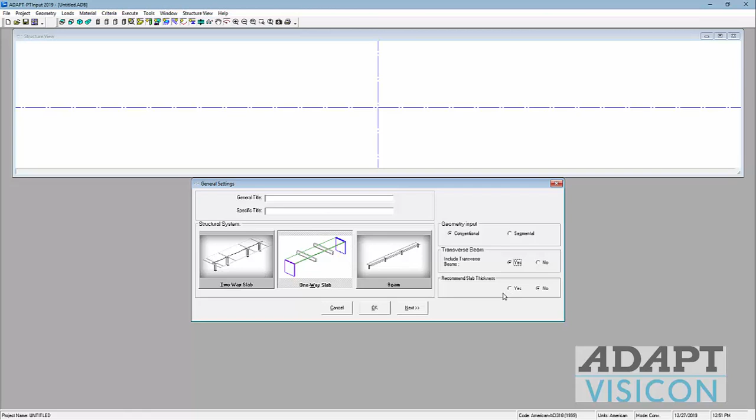We will include transverse beams as supports for the one-way slab, and we'll go ahead and leave off the recommended slab thickness. If we select this, the program will by default recommend that thickness in the span geometry input. So we'll go ahead and select next. We're going to select ACI 318-14. We're going to leave the design settings analysis options as set here.

One thing to note is we want to make sure we use interactive. This gives the user the ability to interact in the recycling screen, meaning you can change the force profile, etc., without having the program automatically converge on a solution and exit out of the recycler in an automatic fashion. If there are questions about these other selections, you can refer to the documentation found under the Help menu, which gives a definition of each of these different options here for the analysis.

Under Design Options, we're going to use all provisions of the code. There is an option to disregard the following provisions. So if we select any of these three or all three, for example, the program will actually ignore that in the processing of the design.

So one questionable option here might be the design capacity exceeding cracking moment, which is not technically necessary for an unbonded system using ACI. However, even if we don't disregard this, the program still actually recognizes the fact that we're going to set the tendons to unbonded, and it will not add any additional rebar to meet this criteria. So we'll just use all provisions.

Below, under generate moment capacity based on, this just means that for the capacity and demand report that's part of the report generator, block number 32, the program will show capacities which are based on the calculated reinforcement, post-tensioning, and user-defined reinforcement. So whenever you generate design value moment capacities, those should always be greater than the demand.

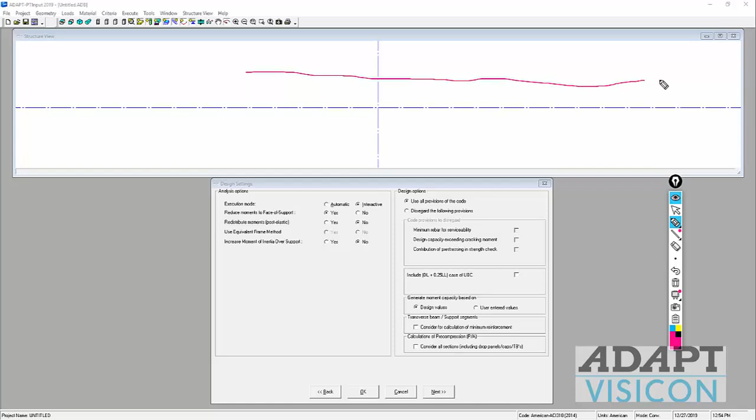The next option allows the user to consider the calculation of minimum reinforcement relative to the transverse beam. For example, if we take just a longitudinal elevation view of this system, we're going to have basically 7 spans that look like this. And if we look at how the program calculates minimum reinforcement at this section cut here, that could either be based on only the depth of the slab, or it could be based on the depth of this full transverse beam, which obviously would lead to more minimum reinforcement.

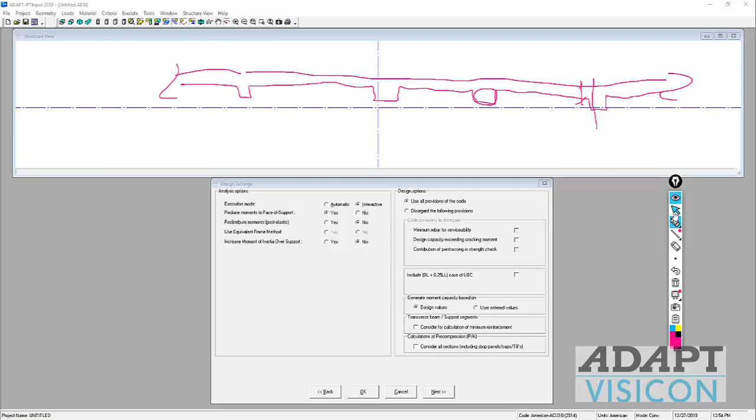So this option here allows you to consider this full depth for purposes of minimum reinforcement for a one-way slab, which is 0.004 times the area of concrete in tension for a one-way slab subject to the ACI 318-14 version of the code. We're going to go ahead and leave that off for now.

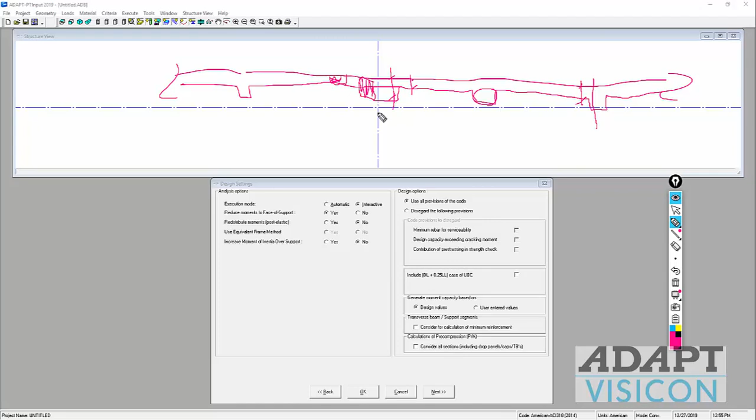Also, calculation of precompression. The program also can calculate and essentially determine a force necessary to meet precompression. That precompression can either be relative to only the slab depth or the transverse beam depth. So depending on what you select, if I select this, then you'll likely have a higher force necessary to meet precompression because, if I take this out of plane for example, it's having to calculate a force based on this full block area versus just the slab area, which might be just this block here. So you have two options there.

We're going to base everything only on the slab depth for this example. We recommend the user make their own interpretation of how the code is read and how that should be interpreted for design. So the option is given here under design options.

We'll go to next. I'm going to go ahead and set this up to 7 spans. The outer spans are going to be 30-foot bays. The interior spans are going to be 27.5. So I'll just copy and paste those down.

For the width, we're going to just base this on a unit strip. So we're going to say if we have, for example, a plan view, we're going to have beams. These will be the post-tension beams that we'll show also in another tutorial for effective beam design in this program. So we're going to say the span is this way. We have slab spanning this way with 7 spans.

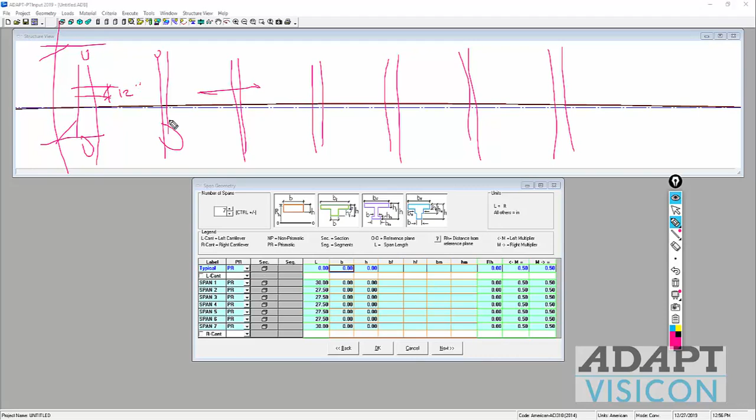And because we might have a unit strip representation, we don't really have to model this full panel. We can model just a unit strip based on whatever arbitrary width you want. Typically this will be 1 meter or 1 foot, 12 inches. We're going to base this on 12 inches. So we'll say that the B dimension here is 12. And the height for this slab we're going to say is 7 inches.

If I enter the data in the typical column entry or the typical cell and press enter, that'll push those all into the different spans. And you can modify each span separately as needed. For the reference height, we're going to set the reference height equal to the depth of the member. So if we zoom out here, we can see the datum or the reference line is this line here. If we leave this to 0, that's fine.

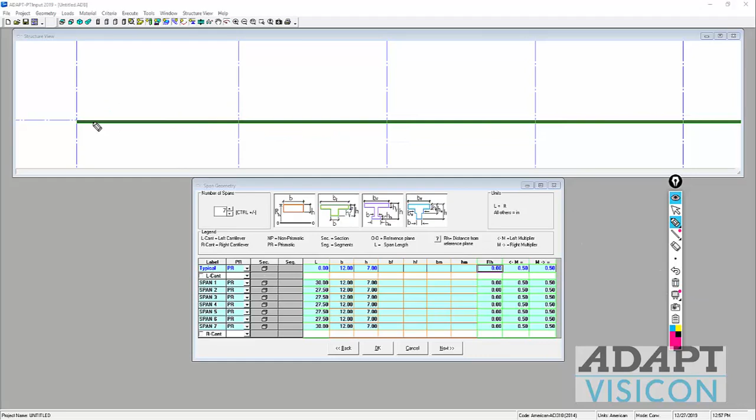This allows a user to actually step a member. So if you wanted to offset this span up, maybe this one down, you could create offsets in the member. However, if we leave this slab, which is the same elevation along each span, as 0, the control points for the tendons are going to be based from this datum downward, so they'll all be negative, which is not typically how we may reference them on plans for construction drawings. So I'll set this equal to 7 so that the program will represent everything upward, which will be positive from the slab soffit. So we'll go ahead and press 7, enter.

The multiplier, this left and right multiplier, if I go to a plan view, and I'll use these icons at the top to control the visibility of the structure view. I'll go to the plan view, and what this means is that the left multiplier right here actually is this side. This is the left side. If I'm standing here looking this way, this is the left side, this is the right side. So we take this B dimension 12, we multiply it by 0.5, and that just pushes a portion of the tributary this way and a portion this way. It's centered, 6 inches on one side, 6 inches on the other.

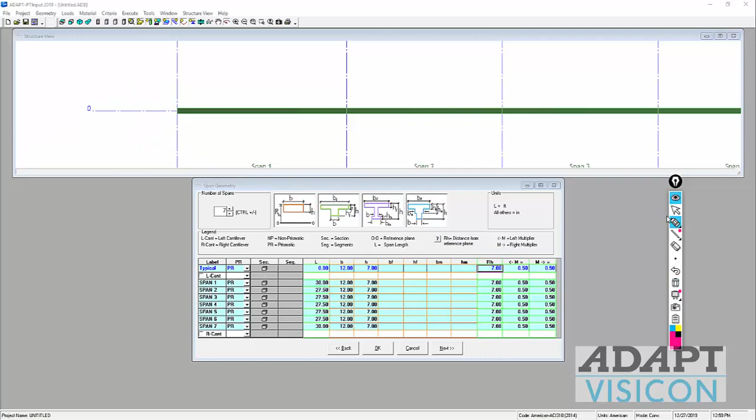If you wanted to base the design on the full panel width, let's say the full panel width is 30 feet, we could input a 15 value here. And we'll do 15 times 1 foot on one side, 15 times 1 foot on the other side, and now we actually base the design on this full panel. This will be like a full bay in this case. So you can increase this to something greater than 1 if you wanted to.

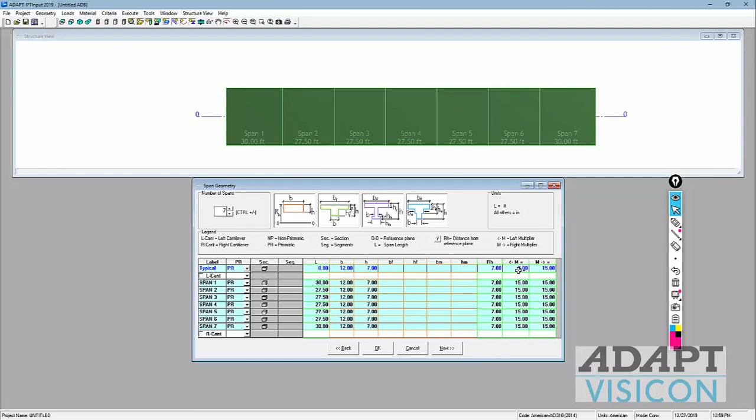Okay, so we'll go back to the unit strip of 1. We'll go next. The transverse beams now, we're going to define what those transverse beams are. So we're going to say for each support 1 through 8, we're going to have a transverse beam. I'll go ahead and select this and press enter. The height of the transverse beam we're going to say is, let's say this is 21 inches. Okay, this is from the top of the slab down.

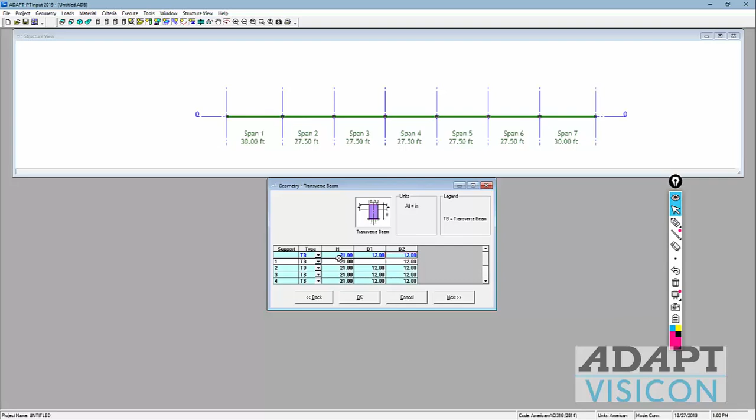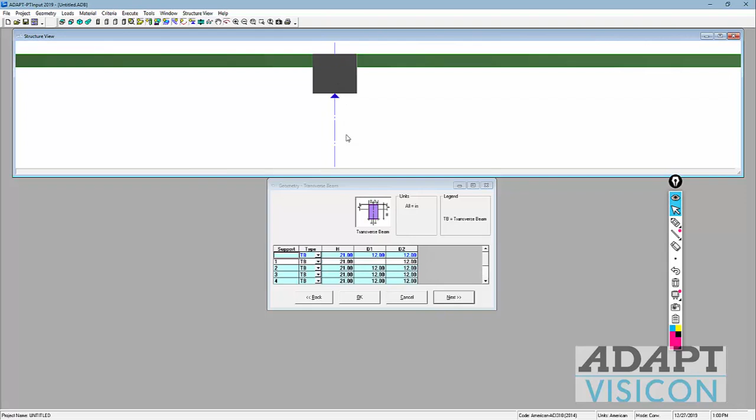The D1 and D2 will say it's 12 by 12. So we'll say this is 12 inches and 12 inches. And having done that, you can see the member here. Actually, let me come back to, okay, so I'm just looking at the wrong view here. I'll go back to a side view, and this shows that member depth. You can see there's actually a pin support. By default, when we create a transverse beam, there's a pin support associated with the joint. So those are the transverse beams now.

For the support geometry, because we're using point supported transverse beam, we don't really need to fill any of this out. If you did have a wall below or a column, for example, typically a column might be more associated with a two-way slab versus like a wall, which would be a continuous support, which would then fall into the category maybe behaviorally of a one-way slab. If you have a column support, typically you would have two-way bending near the column.

So we'll leave the lower and upper walls options set to off. We're using the transverse beam option. This left and right edge, this is applicable only to two-way slabs. That's defined in the two-way slab tutorial.

For support width, we're going to take a look at some of these options here. By default, the support width is set to 0, which means that the program doesn't have a width that it can dictate where you're going to cut face of support moments and shears and design values at. As the user, you can choose to select support width here. That will automatically define the support width as the dimension of the transverse beam.

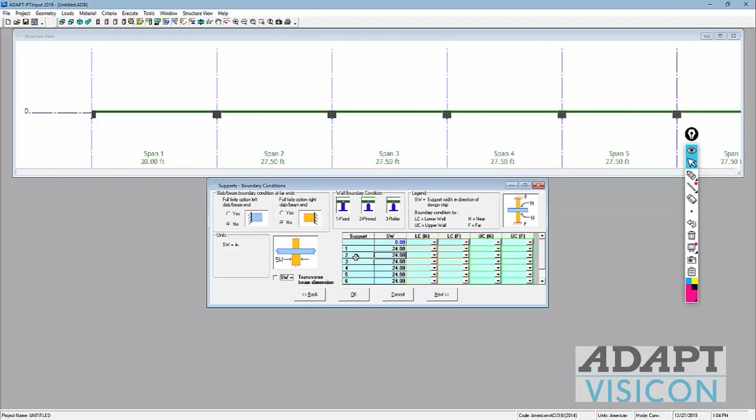If you wanted to try to override this, notice it locks you out unless you deselect, and now you can actually override to a different value. So this tells the program where to cut face of moment and face of shear values off for the design. We'll just use the transverse beam width.

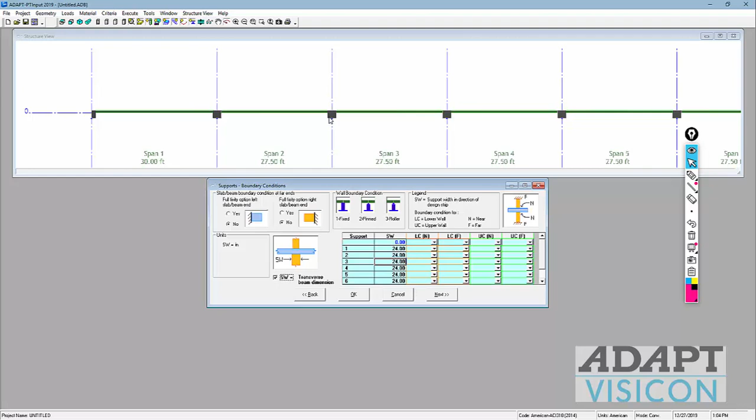You can also modify here the support fixity at the joint near the slab or beam, if this was a beam design, or at the far end. That's controlled here. Notice these are all inactive because by default we have a transverse beam which always creates a pin support at that location.

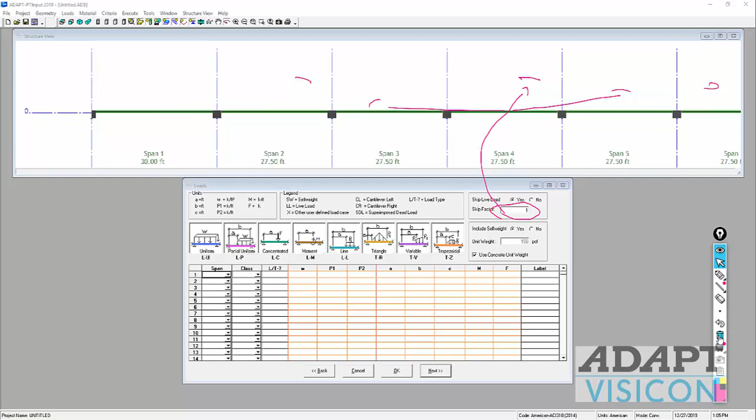We'll now go ahead and load the slab. We're going to turn skip live loading on. Skip factor means that whenever the skip live load is applied, maybe it's applied in this bay and in this bay and in this bay for the first of 6 patterns, the program uses this skip factor to the application of those different live loads. So define the skip off or on, define the skip factor for the live load.

You can include self-weight automatically, which we're going to do. The program will calculate the self-weight of the members automatically for the analysis. I can either input the span number here, so maybe I want a live load and a superimposed dead load in each span, or I can select all, and that will fill out all spans the same. So we'll just say all here, all there, and this is going to be a live load.

I can select the identifier for the load type. This is going to be, for example, a line load. Maybe it's a partial uniform, concentrated. I'm using the second character in these descriptors in this input to change the different parameters that define the load type. So here I'll just use uniform in both.

We're going to say that the dead load is 15 PSF and the live load we're going to say is 50 PSF. This is all written in terms of kips per square foot, hence the entry for 0.015 and 0.05. So once I select next, you can see if I come back to that, this actually gets extrapolated out to each span. If you wanted to add other load to all spans, I could just enter a new character here for all, and so on.

Other classifications of load are X load, which is just kind of a wild card load, if you will. And if you turn off the self-weight inclusion, this will now allow you to classify load as self-weight also within this dialog.

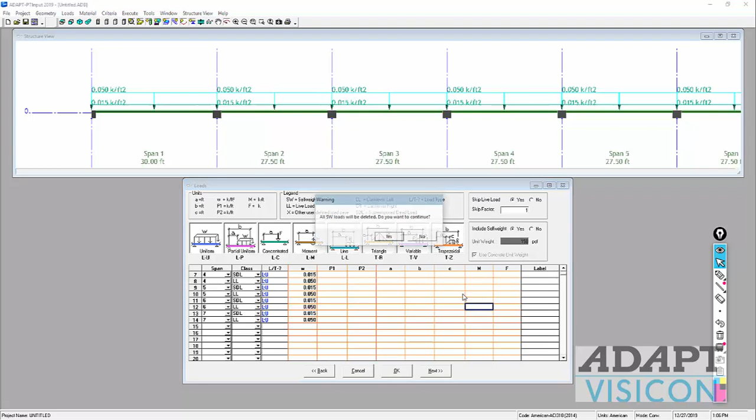Okay, the strength of the concrete we're going to say is 5,000. If I press tab, the modulus does not change. You need to press enter, or you can manually override this. If I press enter, the modulus changes. The creep coefficient will be 2, and the concrete strength at stressing is going to be 3,500. This is typically about 0.7 to 0.75 f'c at 28 days.

We'll go to next, and here we're going to determine our material for the reinforcement, both longitudinal and shear. We're going to leave the yield and the modulus alone. I'll go ahead and change the slab sizing to #5s and #6s on the bottom. For shear reinforcement for the slab, typically we wouldn't have any, but we'll just say this is #3 bars with 2 legs for each 12 inches of unit width of the slab.

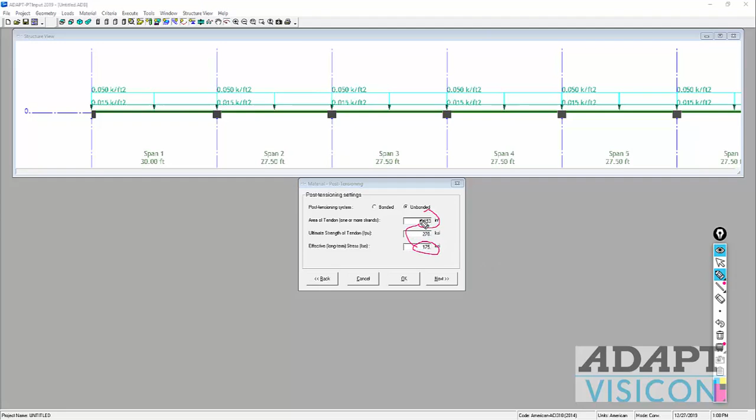For post-tensioning, we're using unbonded half-inch diameter low-relax cables. Ultimate fpu is 270 ksi, and the effective stress we're assuming is 175 ksi. If we multiply the effective stress here by the area here, we're going to assume basically an effective force of 26.7 kips per cable. So that's our force assumption when the program generates a required force for the unit strip.

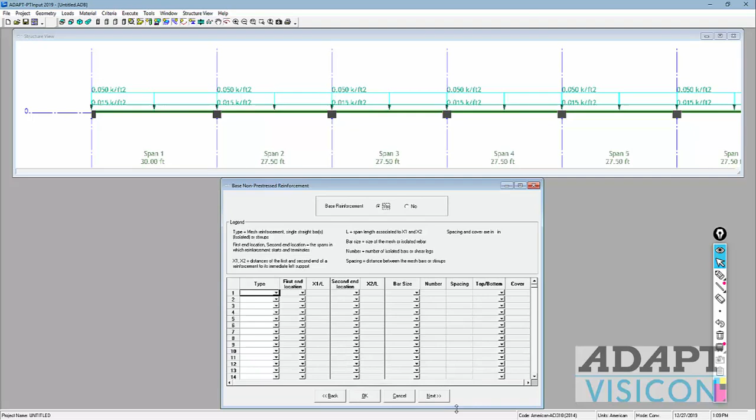Now we could use the calculated force method, in which this number doesn't really mean anything. The calculated force method allows the program to actually calculate the loss along the length of the cable. So we'll show that entry here in a moment. If you wanted to add any minimum reinforcement or base reinforcement to the members, you could select yes, and we could then fill out this table based on the reinforcement.

Just as an example, we're not going to use this, but if I say I want a bar in the 2 end bays at the bottom, I'm going to say, okay, I want an isolated bar. The first end location is going to be in span 1. The second end location will actually be over in span 7. It will start at 10% the span length in both spans. This is relative to the span start and end point. The second end location we're going to say will be in span 1. This will be in span 7. And we'll say this is 0.9 and 0.9.

Bar size, I'll use #5s. We'll use 4 bars. Actually, let's use 2 bars for 12 inches. And this is going to be a bottom bar. Cover, we'll say, is 0.75 inches. This is cover to the longitudinal bar.

Okay, and by doing that, if I go back to the top view, the program's added bars in this span, 10% from the left side, 10% from the right side. And if I go back to the extents here, you can see the bars over here also. So this is just a way to add known reinforcement in the spans as needed, top or bottom. For this example, we'll go ahead and select no. We're not going to actually use the base rebar. We're going to allow the program to just calculate the reinforcement for us.

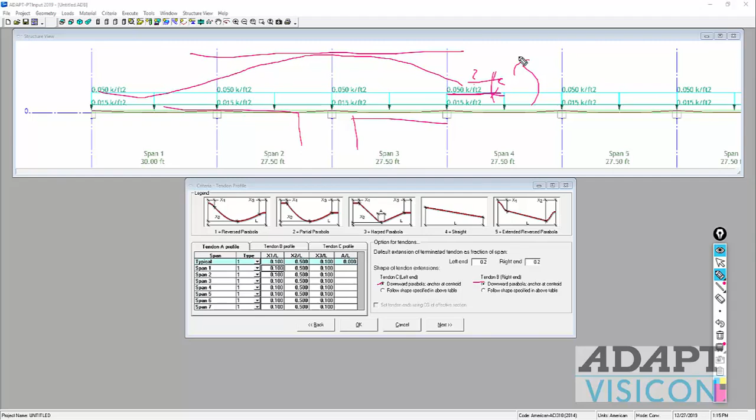Or does it just follow the shape function for this cable, for this reverse parabolic shape? If it follows a shape function for this, then you're likely going to have the centroid here and this eccentricity, and you're going to crank a moment into the slab at that location. So typically we're going to anchor at the CG of the slab. We'll use the defaults in this case.

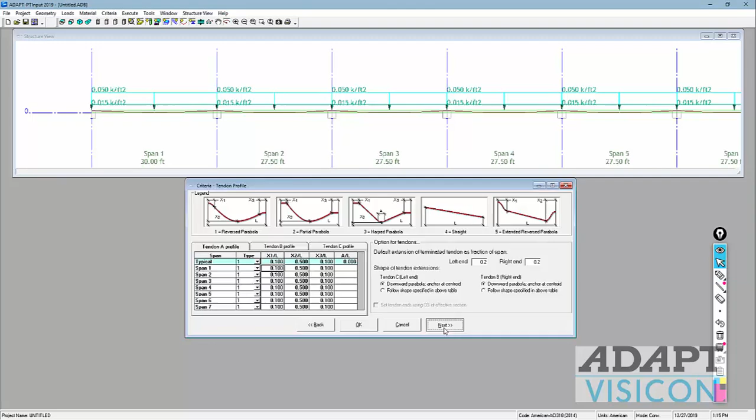Okay, the cover, the criteria, we have one set to the top fiber and the bottom fiber and interior spans. Exterior for fire rating, we may need this to be a little more. This is 1.75. We'll assume this is an unrestrained condition where that may dictate needing more cover, again, for the exterior spans. And then we have our bar covers here for reinforcement.

The way the program generates reinforcement can either be based on these simplified settings, which are just cutoff lengths for bars over support. So when the program adds rebar at support, it's going to extend it 0.17 to one side, 0.17 to the other, and then in the span it will be 0.33 to this side, 0.33 to this side. And it will also apply these extensions to strength reinforcement. This might be for minimum reinforcement. Strength reinforcement would be dictated on the moment diagram.

So if I have a moment diagram that looks like this, then we determine, okay, where's our cutoff inflection points? There's a 0 moment here and here. The program might say, okay, take half of the demand. If this AS, I'll call it ASM, AS max. If I go down and cut that in half, maybe this location here, this is called, let's say, AS2.

The program might require bars to run from 0 to 0 plus the extension that meet AS2 plus another 2 bars that extend past that AS2 mark. And the program's algorithm usually will cut bars into 2 different segments like that to try to economize the design rather than just running the requirement for AS max beyond point of 0 moment. That's what this cutoff is here.

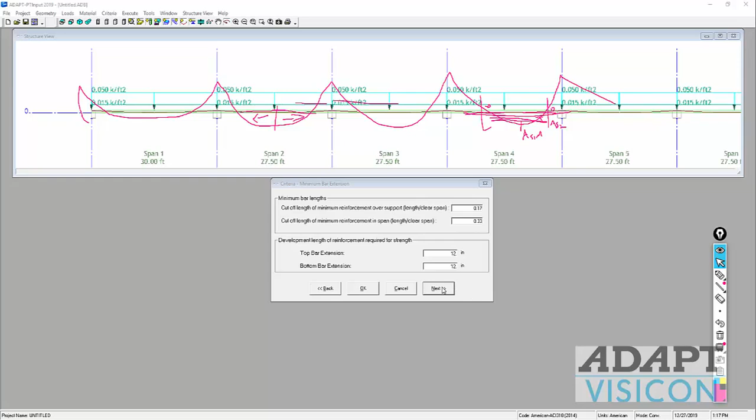You can also dictate and customize the curtailment of rebar in the next window. So this allows the user to set up how the bars should be curtailed and customized. If you use ACI 318, then that kind of follows the ACI code requirements for top and bottom bars depending on location of the bar. We have entries for both long and short bars, and then the percentage of the bar or the total area of steel that gets allocated to each bar type, long or short.

You can also go to adapt. If you use adapt, this actually fills out this table based on these inputs here. So this input here should actually be the same as this if you use curtailment. You can turn curtailment completely off. You don't have to use it, and the program will just default to this output here, which is what we'll use in this case. So you can set curtailment for top and for bottom bars. It is an option. For this simplified example, we're going to just allow the program to base it on the default options in the previous screen.

The last input will be the load combination. So we have strength combinations, which include the secondary moment of the post-tensioning. These are gravity oriented, and we're going to also include two service combos for sustained load. Notice there's a 0.3 factor to live load and X load. We have no X load in this model, so that really is just 0. And then for total load, we consider all load applied unfactored.

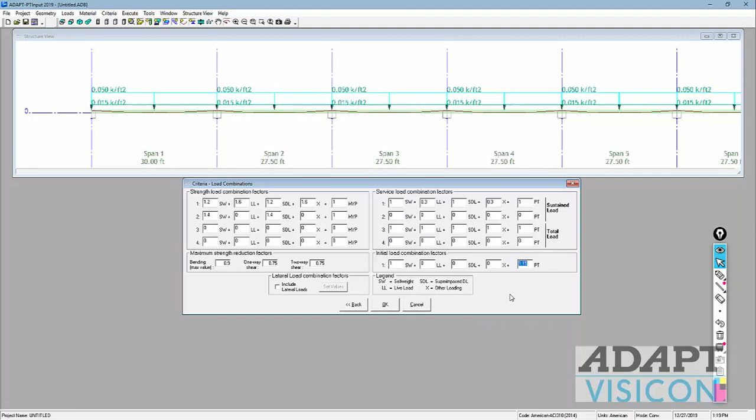The initial combination includes only the self-weight of the system plus 1.15. The 15% is the increase in the PT force because at initial condition we're just simply adding back in the long-term loss on the cable using the 15% estimate.

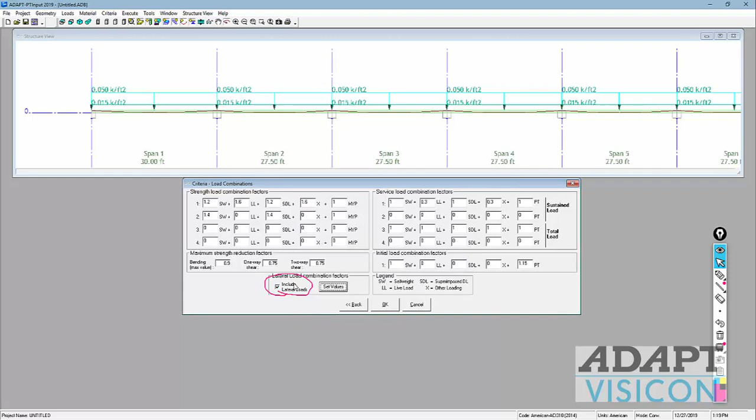You can also include joint moments at the joints if this was a frame, for example, a moment frame, and you were designing it also for lateral moments. This really applies more to beams, I think, but we could include lateral joint moments here and also additional combinations, including those lateral moments. So the moments are input in this table. The combinations are then dictated here. Okay, we're going to leave lateral off for this example. I'll go ahead and select OK, and I'm going to save the model.

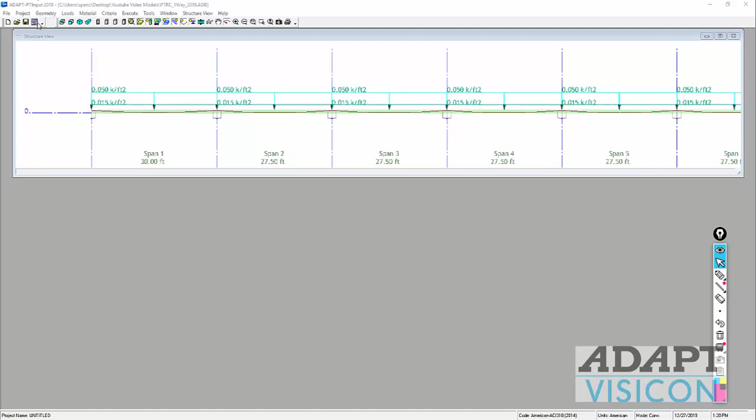Okay, now that the model is saved, we're going to execute the model. So the first thing the program is going to do is determine what post-tensioning we need for this 7-span one-way slab system. We'll go ahead and run that. This may take a few seconds to run. You'll notice it's kind of working in the task bar below. Once it's done, it will basically show the recycler. This is called the PT recycling window. We call it informally the recycler.

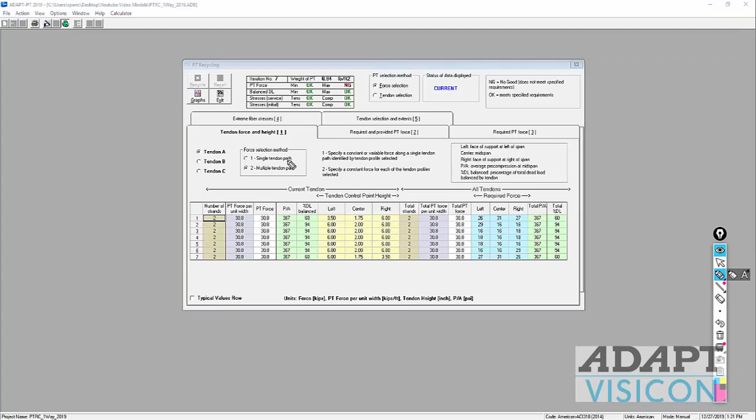So in the recycler, we have a lot of information here relative to the design. First, we're using effective force method by default. We've set the criteria to meet min and max P over A, that's this option, balanced loading min and max, and then whether or not we're meeting the stresses sustained and total and initial.

The table at the bottom shows the current tendon, which is selected here. This is tendon A, and then all tendons, which would be the sum of A, B, and C. Well, we have not yet set anything to tendon B and C. We're only using tendon A by default, so these tables really should match right now, this one and this one. Once I add tendons B and C, then this would be the sum total of all 3 tendons that are used in the design.

So the current proposed design by the program shows that the force for a 12-inch wide strip is 30.8 kips, which means that the precompression is a little bit higher than what we set. We set an allowable max of 300 psi. So we still may be able to live with this, but because we set it in the input to 300, it's actually flagging it as no good. That does not necessarily mean it does not meet code. It just means that it does not meet a constraint that we added inside of the allowable precompression in the input of the program for this particular model.

So the minimum precompression is fine. That's above 125. The balance loading is above 50 and below 100. That's all okay. And then the stresses, tension and compression, say okay. Now if I go to tab 4, I can see for total, my allowable for total was 7.5.

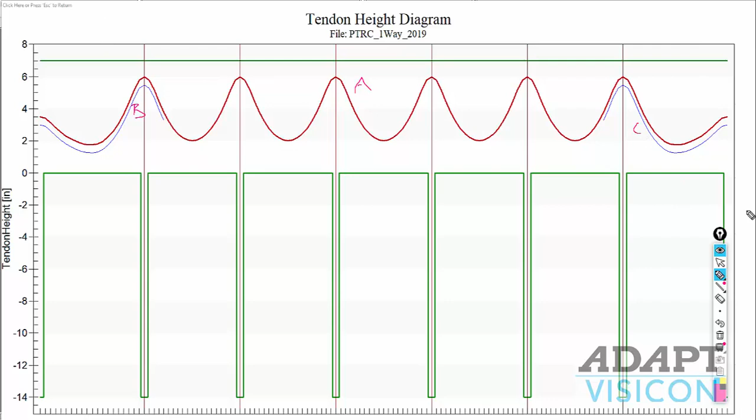Okay, so this will be a satisfactory design again if we're willing to justify the fact that the max P over A is greater than 300. If I don't want this no good to show up, I would just go back into the input and set my max to 400, which could be an applicable modification made to the design. Again, max P over A is not dictated by code.

It's more a function of economy for the design and constructability, whether you can actually fit enough tendons within a 12-inch space where they anchor for this particular design. So we'll say that this is a workable design.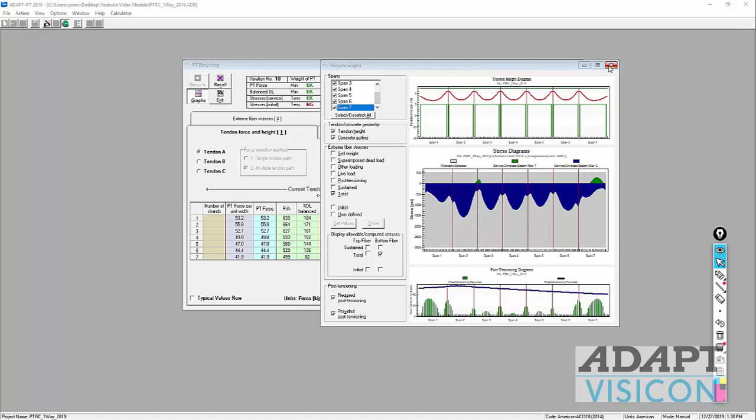Okay, and now what we see is this type of profile. So this is a varying profile. We're losing force as we move from live end over to dead end. This is live to dead, and this loses force. The average of this curve is roughly 27.2 kips. So it's actually more than the assumed effective force of 26.7. And that might be why this now fails. The stress for initial and tension exceeds 3.

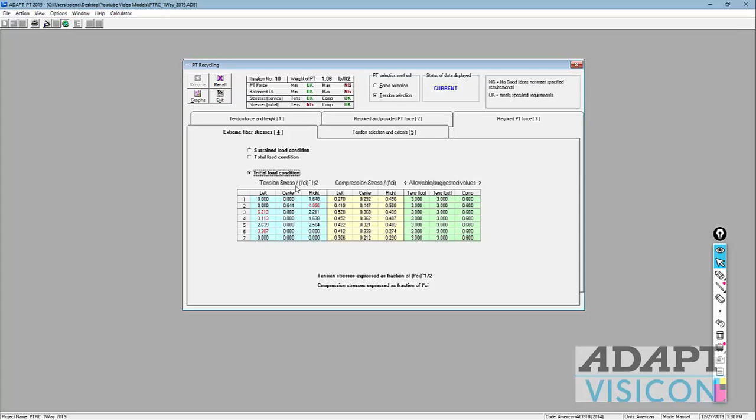If I go back to tab 4 and select initial, this is up at 5, 6, and the code allows you to add reinforcement for overstress under the initial condition. So the program will actually add that reinforcement. So even though this is no good, the program adds reinforcement for that one condition per allowance by the code. Balanced dead load is also no good. You can see we have more dead load balancing than we want for this case. And that again might be because we actually have more force than what we really need.

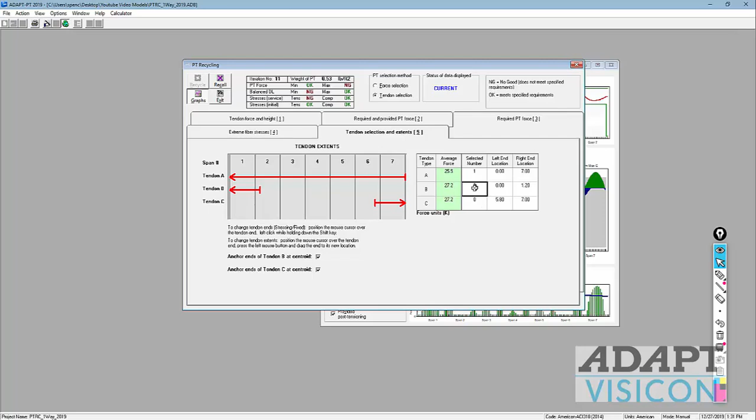Originally we needed 31 kips. Well, now I selected 2 tendons with an average force here. It's actually back down once it calculated to 24.6. I have a force of roughly 50 kips. I could set this to 1 and recycle, but nothing is going to work in this case in those exterior bays. Now we only have 27.5 kips in the exterior bay, and we needed roughly 32 kips. So we can come back and say, okay, use 1 tendon A, and then we'll use 1 tendon B and C in those positions. And we'll recycle again.

And we're kind of back to where we were initially. We have some overbalancing. Maximum is no good in this end bay. It's 105%. Again, why is it more there than the other end bay? Because that's the live end. This is the dead end. We lose force going from live to dead. This would also be most likely a workable design as well. We have a little bit of overbalancing.

I can adjust this cable profile. Maybe I bump it up to 2 and recycle. This is down to 101. Everything else is working. I can adjust that maybe a little bit higher. Let's move it up another 1/2 inch. And now we're less than 100. So this is also an option. If we have overbalancing, we can try and adjust the cable profile.

After we've designed the post-tensioning cables in this interface for PT Recycling, we're going to exit. And now the program can calculate reinforcement and deflections. Once it's done that, it will go back into the program shell, as we call it. And the shell allows the user then to look at results. The most commonly used result in the program is found here, this summary icon, this yellow icon. So we'll go here to the summary.

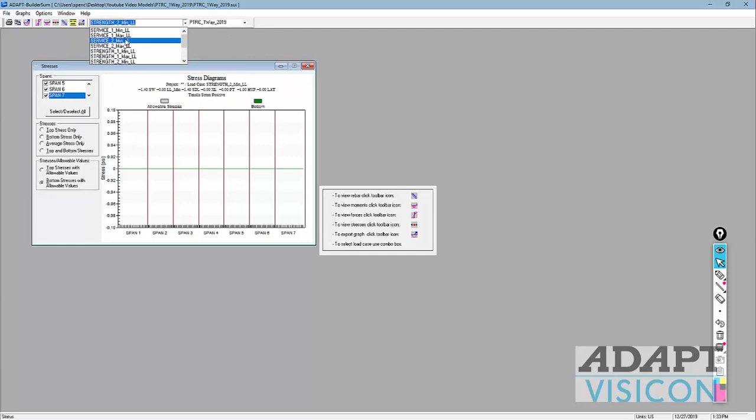Graphically, for any load combination, we can show shear, moment diagrams, etc. for the combination. We can show reinforcement demand for the combination. We can show stress diagrams for the combination. This would not produce for strength because we don't check stresses for strength. Maybe I want to look at service stress. So graphically we can show combination results.

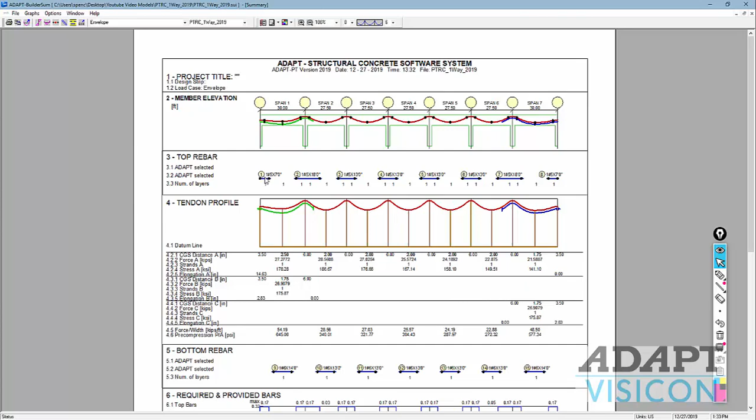The real nice report here is really the summary. I'll go back to envelope and I'll look at the summary report. This is just a report that can be produced as a printout or PDF, and it shows the geometry, the reinforcement top and bottom, and the way it's allocated within the span. The number of layers just means that the rebar can be placed in one layer, not two or three or four. This is saying it will fit within one layer.

The profile of the cables, and then the forces. This is the force of tendon A, B, and tendon C over here, and the CGs of those different cables. It's also showing the elongation. Because we did calculated force method, it's showing that at the live end here we have an elongation of, for example, 14.63 for tendon A, 2.83 for tendon B, and then 2.83 for C.

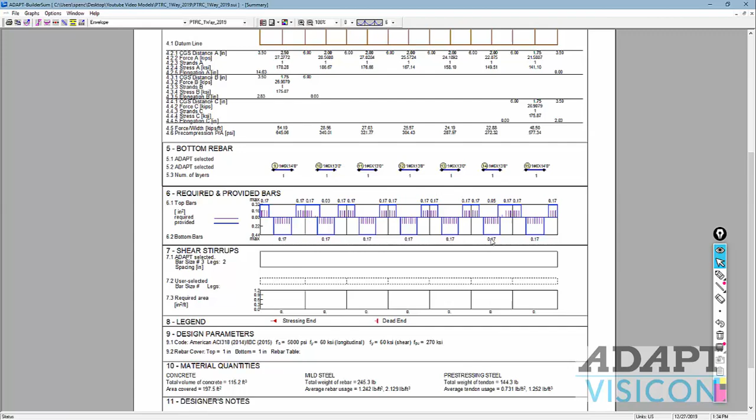Additionally, we can look at some graphical results for required and provided rebar along each span, top and bottom locations. There are no shear requirements for this one-way slab. This is basically zero. And then we get deflection diagrams in the second page here on the bottom. So these deflections, we want to check and make sure those meet the requirements.

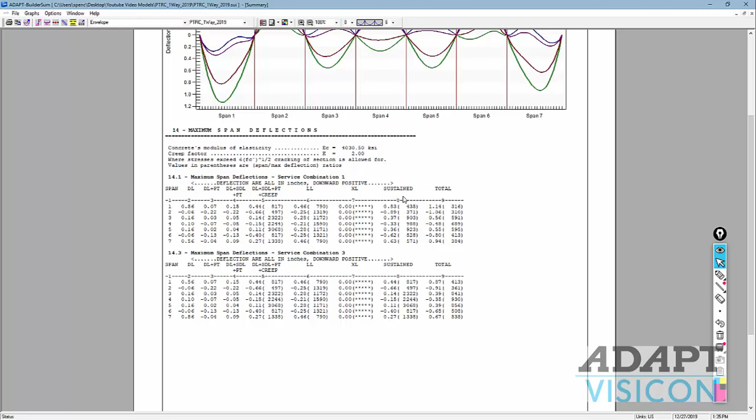If you need additional information on how the calculation of deflections work, you can look at the user manual for ADAPT. There's a deflections section, and that shows an example on how the deflections are calculated and how the creep factor is taken into consideration for the sustained loads, self-weight, dead load, PT, and also a portion of the live load under sustained condition. So this is Builder Sum.

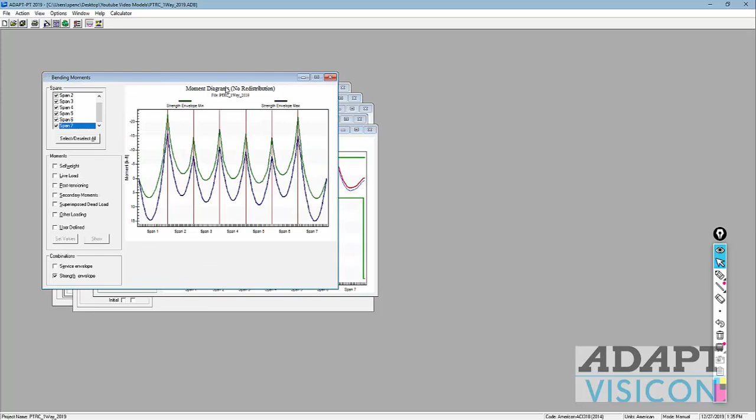I'll close Builder Sum. If we use this option here, this is what we call the shell results, and these just show kind of the raw results for bending, shear, deflections, stresses, and so on. So the difference between this and Builder Sum is these are raw results which you can then combine into combinations using these selections of load cases. They're not necessarily each individual combination plus the envelope result.

Lastly, if we go to the report setup, we can produce a tabular report of selected options here. So if I go to the compact report, for example, the compact report versus the detailed report, compact would mean that the program produces results, if these are my spans, at left, center, right of each span. The detailed report shows results at every 20th point on each span. So this gives you much more detail in terms of the different output for shear, moment, deflection, etc. for the system.

And then you have a concise report. The concise report just predefines several options for the report format, geometry, applied loads, design moment. This might be the most common report if you just want very basic results. Compact report is actually recommended for a more thorough report, but doesn't take a lot of time to produce, and it gives you most of the information you need for a submittal.

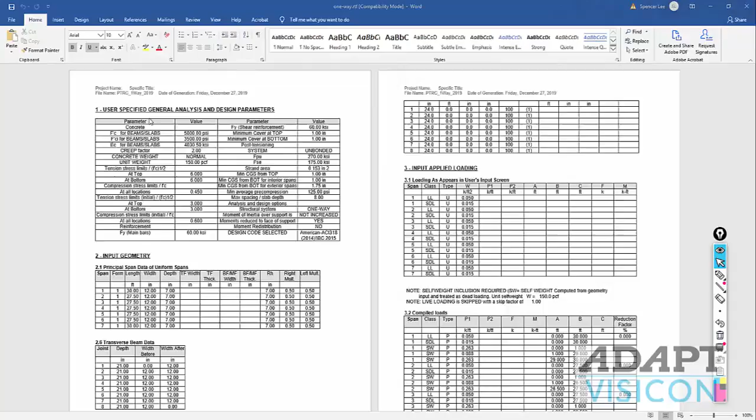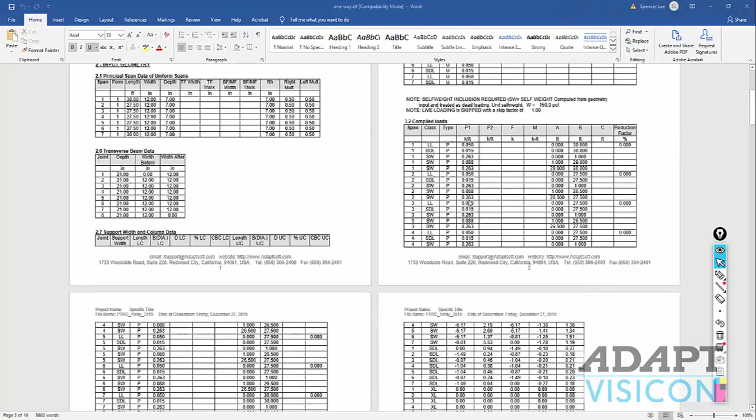So under tabular reports, if I go ahead and just create that report, the program will allow me to generate this as a Word document in an RTF format. Okay, and this is the format. You can see it's just a tabular report with different blocks of information relative to the design. So this report, along with the Builder Sum summary, is a good compilation for each design and a submittal for a design.

You can also save a report. Maybe you only want to save, for example, deflections. So if I say I want to go to compact deflections and also maybe detailed deflections, then I can select both of those. I can go ahead and save this selection, deflection report, select OK, and that should be then saved here under the selection option for user-defined reports.